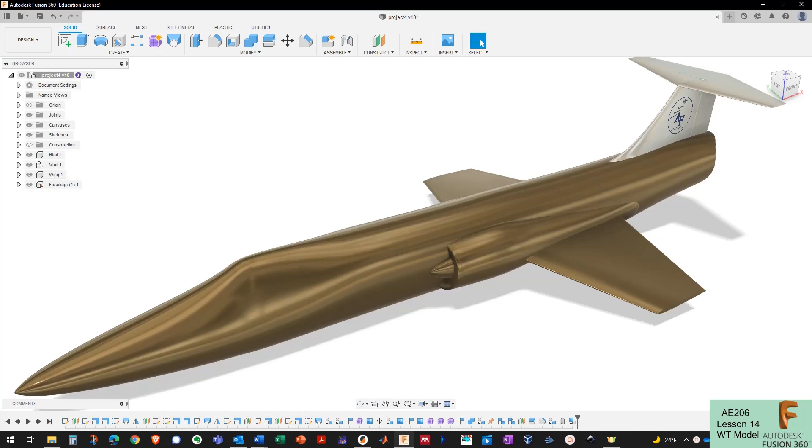Welcome back. This is part 5 of Project 4, where we are going to take your airplane CAD model and get it ready for testing in the wind tunnel by scaling it down and doing what we need to do to be able to print it and mount it on the sting balance in the subsonic wind tunnel. And then I'll also show you how to just print out a display model of your airplane.

Okay, so this is part 5 here. We're going to walk through all of this stuff here. You have two options in this project for what you can print. You can print the full wind tunnel model and join it together so we can actually put it in the wind tunnel, or you have the option of printing a display model.

Either way, you still have to turn in your final wind tunnel model CAD to me. You also have to turn in the CAD of your final airplane model with the assembled joints from part 4. You have to turn in a 3MF file ready to slice of whatever printing option you choose, and then most importantly a selfie of your completed print with your aircraft, whichever option you chose to print.

Okay, so let's walk through this together with my F104 that I've made throughout this project. And this is the version here that I did last time. It's got my joint in here, and I can see my joint right there. And I want to get this ready for testing in the wind tunnel, and I need to make a lot of changes to this model to do that.

So I'm just going to go ahead and save this as a different file name just to make it easier on myself. It is possible to make all the changes in this model and then roll back those changes if you wanted to get to your full scale assembly again. But I'm just going to save another version called wind tunnel model so that I can make all these changes and have both versions easily accessible.

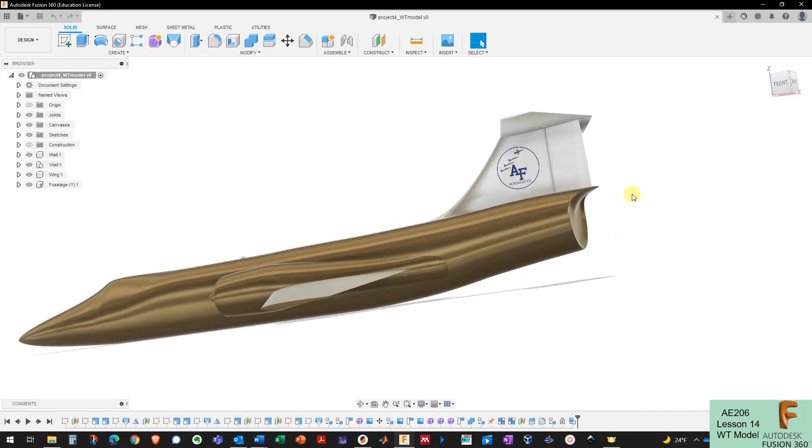So I save this as wind tunnel model, and now that I'm going to print this, I want to get rid of this joint back here that I made for the rudder. It's got this fillet on it, and that fillet results in a very small contact area between the rudder and the vertical tail, and that could be an issue in printing. So I'm just going to get rid of that.

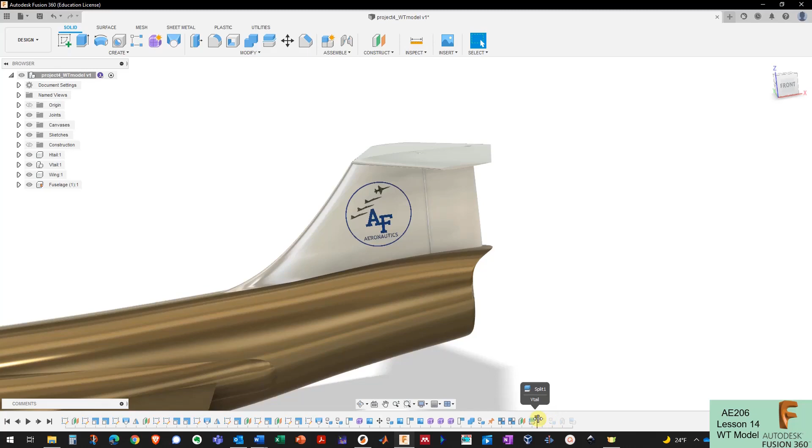And the way I'm going to do that is coming down here to my history and rolling back this timeline marker to before where I made those fillets. You can see the fillet's gone here, and I still have two bodies here, so I want to roll it back before that as well. So I'll roll it back one more. Now I've just got one body for the vertical tail. And in fact, I probably don't even need this construction plane anymore that I put back here to split that, so I can roll it back one more.

And then I can right click and say delete all features after the history marker, because I don't need any of those anymore. Okay. So I got rid of the rudder, I got rid of the joint because none of that matters for printing the wind tunnel model. I'm going to save it again real quick.

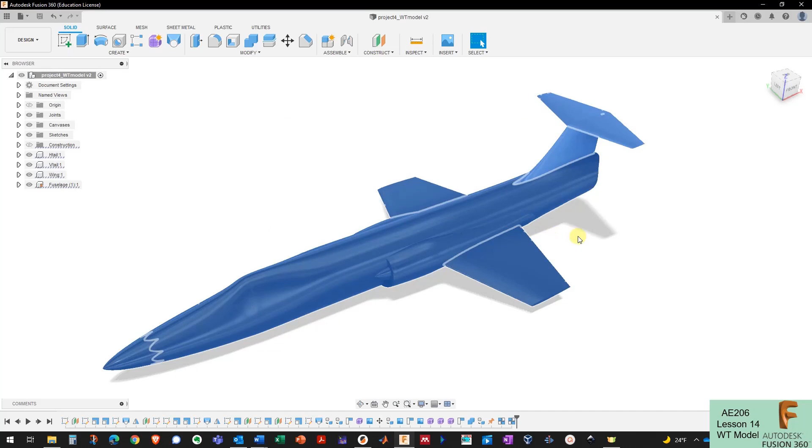And now to get ready for printing the wind tunnel model, the first thing I need to do is combine all these bodies into one body. And so I'm going to select all the bodies. If I select to the right here, I'll only get the ones inside of the selection box, but if I select to the left, I'll get everything that touches the box, and that's what I want.

And then I'm going to combine all of these things. One of them is going to be treated as the target body. The other three are going to be treated as the tool bodies. That's fine. And I'm going to join all these. I'll press OK. And now I've just got one body here, and I think it ended up under the fuselage. So this one body is my entire model right now.

All right, so the next thing I need to do is scale this down to be the right scale to fit inside the wind tunnel. The subsonic wind tunnel has a 3-foot by 3-foot test section, but we wouldn't ever want to even come close to filling that up because of blockage effects.

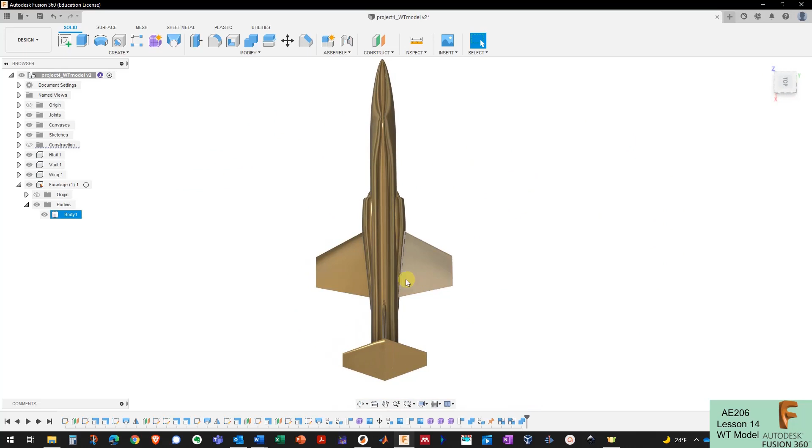So we want to keep the blockage effects in the wind tunnel down to a minimum, and we've usually found that an aircraft with about a 12-inch wingspan does pretty well and has pretty minimal blockage effects in the wind tunnel. My F104 here is a really low aspect ratio aircraft, so if I made the wingspan 12 inches in the wind tunnel, the fuselage would be enormous. And that may produce some moments on the balance that are undesirable. So I'm going to go shorter than 12 inches.

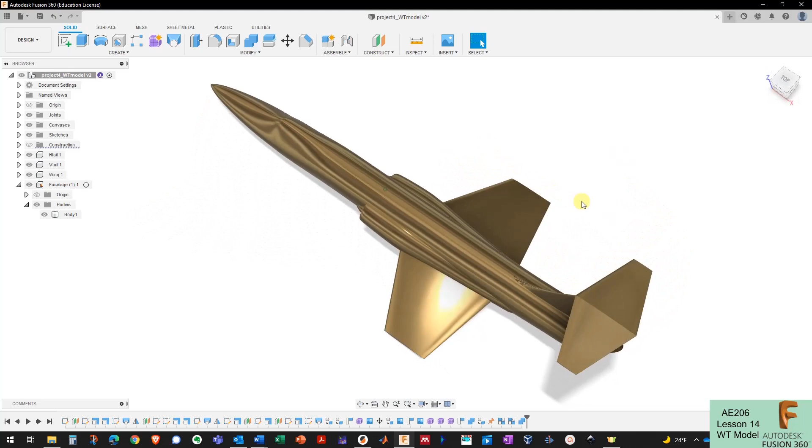And you need to use your discretion in your wind tunnel model. If you have a typical medium to high aspect ratio wing, 12 inches is probably a good number to stick with. But if you have a low aspect ratio aircraft like I do, you might want to go lower as well. So my wingspan right now is still 22 feet, I believe. It's coming up in millimeters right now. I'm going to select secondary units of feet, and yep, it's coming up as 22 feet. It says right there. So I need to scale that down to 8 inches.

So I'm going to select the body here, and I'm going to go modify, scale, and the point I want to scale about is the nose point, so I can find this thing after I scale it. So I'm going to select the nose there. And my scale factor is going to be 8 inches divided by 22 feet. If I press OK, here's my resulting wind tunnel model.

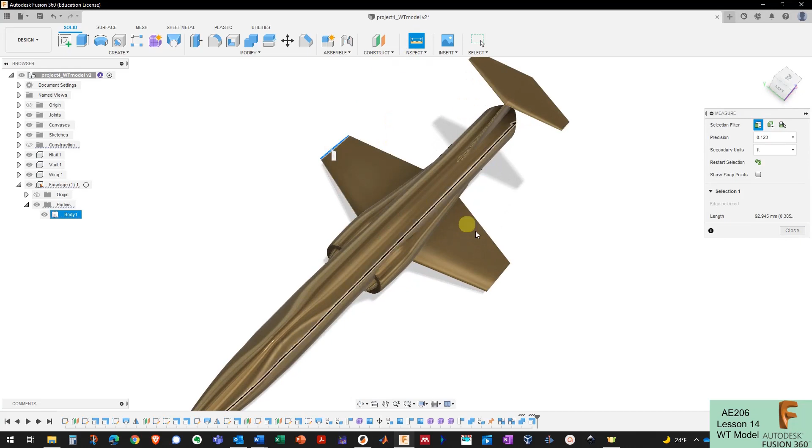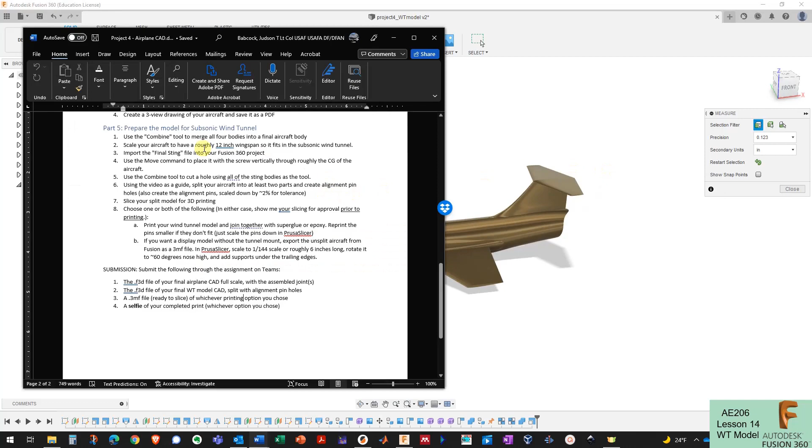And now if I measure the wingspan here, I'll change my secondary units to inches. I've got an 8-inch wingspan. Okay. So now this model is the correct scale for putting in the wind tunnel. And the next step here on the sheet is to import the sting cutout into the project. And I've already got it here. If I open up my data panel here, I've already got the subsonic wind tunnel sting cutout in here.

This isn't the exact size of the sting balance in the wind tunnel. It's a little bit bigger so that it can cut the hole size needed to fit the sting balance inside of with the necessary tolerances and clearances. Okay. So I need to insert this into my design. I'm going to right click on it and say insert into current design. And I'll get rid of the data panel.

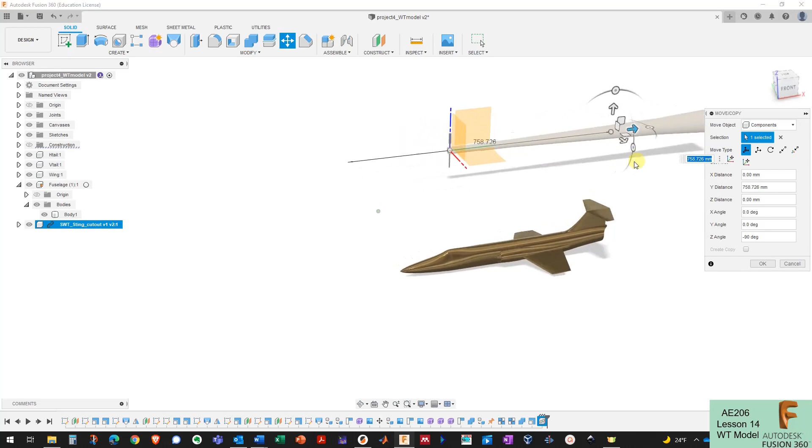And it comes in the wrong orientation, but it's pretty easy to flip around. We're going to turn it around so it can be positioned behind the aircraft. And I can just roughly position it right now. Okay. Okay, so now we need to position this correctly to be able to mount the aircraft onto this sting balance. And the first thing I want to do is make sure that it's lined up centered on the aircraft. We wouldn't want it to be off to one side or the other on the aircraft.

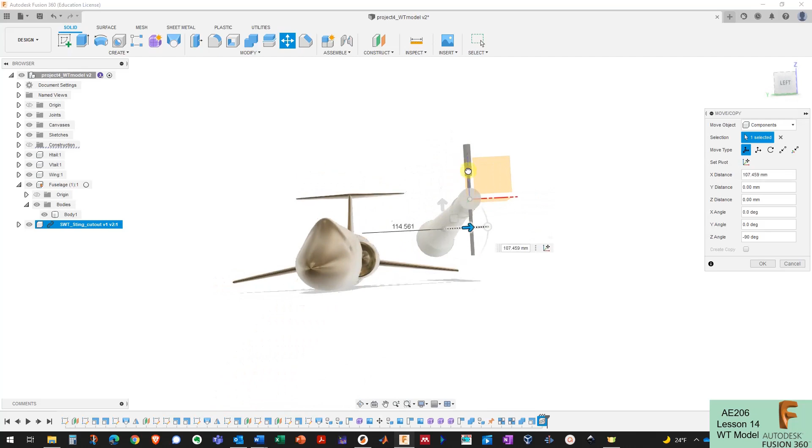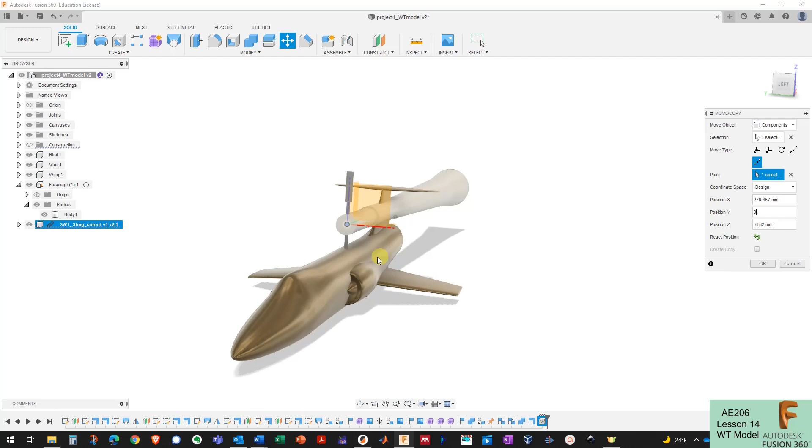So I'm going to choose point to position here. And I need to select a point. I'm going to select the origin point, and this is the Y direction. I'm going to move it to 0 in the Y direction. So now I know that it's centered with the center of the aircraft because my aircraft is centered on Y equals 0 and the sting balance is now as well. Okay. So I can press OK on that, and now we need to decide where to put it up and down and where to put it along the X direction of the aircraft as well.

Okay, so the rule of thumb of where to put this along the X direction of the aircraft is we want the aircraft neutral point to be on the center of the balance. The balance is this front portion of the sting balance assembly here. We want the aircraft neutral point to be centered on the center of the balance so that the moments are distributing roughly an even amount of force between the front and the rear of the balance. Okay, so we moved the sting balance so it was centered in the Y direction, and now the trick to get it centered on the neutral point is to put the set screw 1.9 inches ahead of the aircraft neutral point.

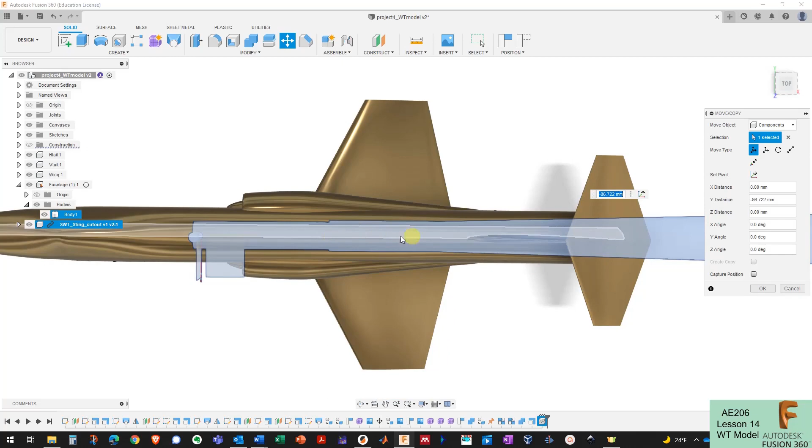Okay, and now we need to know where is the aircraft neutral point, and of course the aircraft neutral point is going to be dominated by the aerodynamic center of the wing, and it's probably going to be a little bit aft of that on an aircraft like this because there is an aerodynamic effect of the tail as well on the overall aerodynamic center of the aircraft.

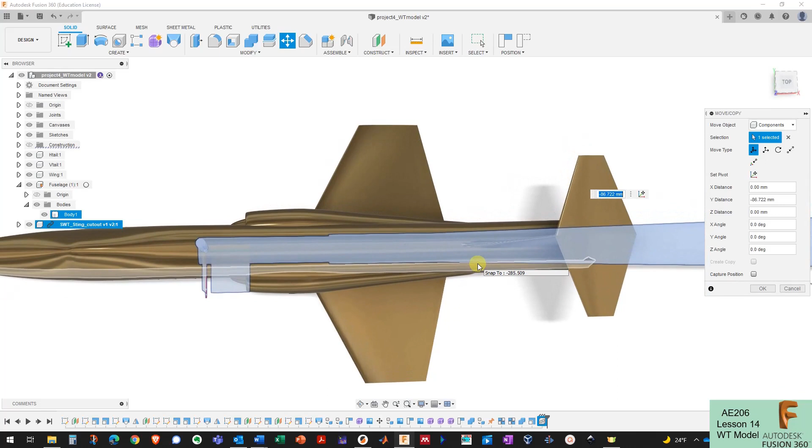But we're going to use the quarter chord of the wing as the aerodynamic center of the wing and the neutral point of the aircraft to get us close in the vicinity of putting the center of the balance at that point to balance out the moments on the balance. And to retrieve that number, all I have to do is go up here to modify, change parameters, and the root chord of the wing was 13 feet. But then I applied a scale factor that was 8 inches divided by 22 feet.

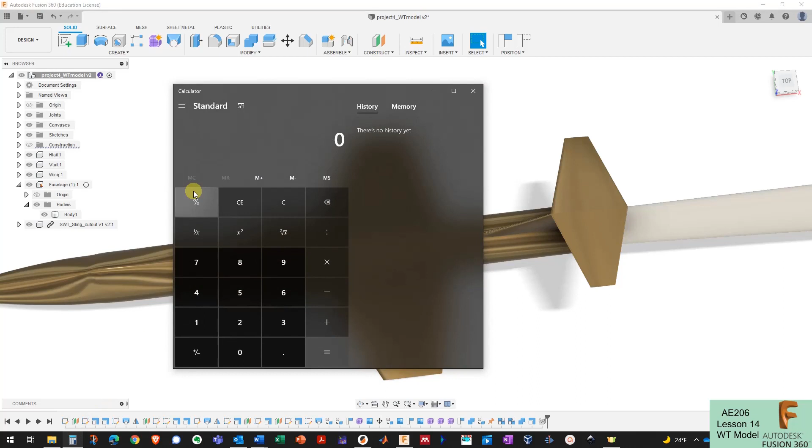Okay, so if I just break open a calculator here, 8 inches is 2/3 of a foot. So if I do 2/3 divided by 22 feet, that's the scale factor that I applied to the original root chord length, which was 13 feet. My new chord length is 0.4 of a foot. In other words, 4.72 inches, but if I divide that by 4, then my quarter chord is about 1.2 inches.

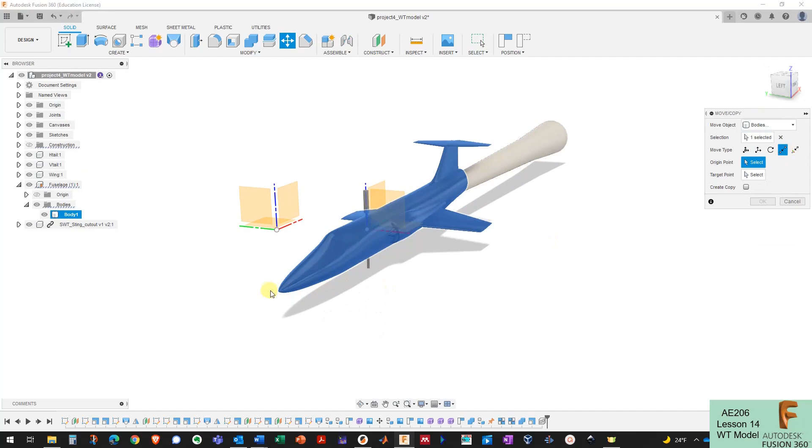Okay, so I'm going to add a sketch plane to make this easy on myself. I'm going to turn on the origin of my model here. Okay, my aircraft's nose is no longer on the origin, so I'm going to fix that really quick by selecting the body, moving it, and I'm going to say point to point. I'm going to move the nose of the aircraft onto the origin like that. So now I've got my aircraft nose back on the origin.

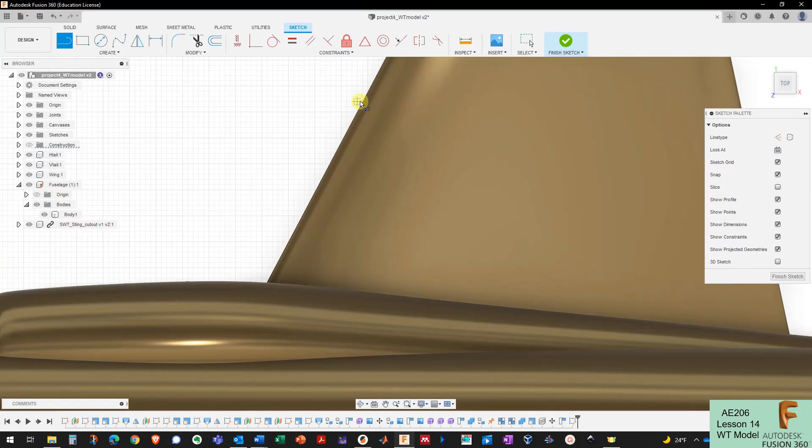I'm going to add a sketch to help myself with this. I'll capture position there. Okay, and now again, I need to locate the point that's 1.9 inches ahead of the quarter chord point. I'm going to add a line here to help myself out locating the leading edge of the wing, which is now buried inside the fuselage. So right now I want to draw a line parallel to the wing, but it's a little hard because of the snap to grid feature that's turned on.

So I'm just going to turn off snap to grid really quick, and now I can draw a line here that's parallel to the leading edge of that wing, right along the leading edge. Now I can do the same thing here. And where these two lines cross, I know that's my leading edge of my wing. Okay, so now I'm going to turn snap to grid back on. Okay, and I'll turn this off just to make it a little bit easier on myself.

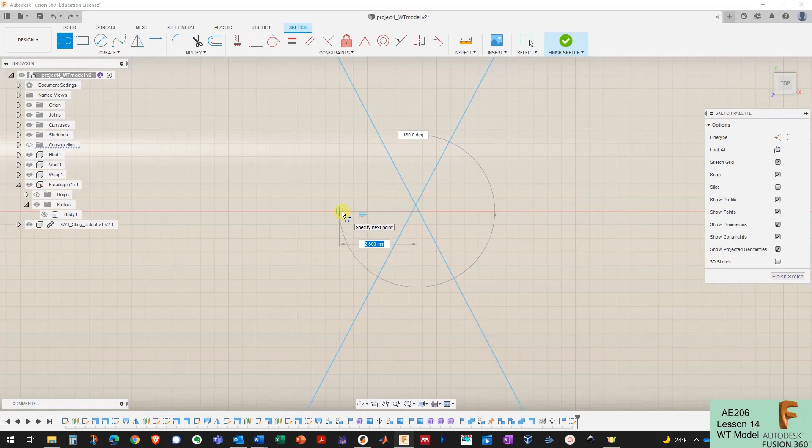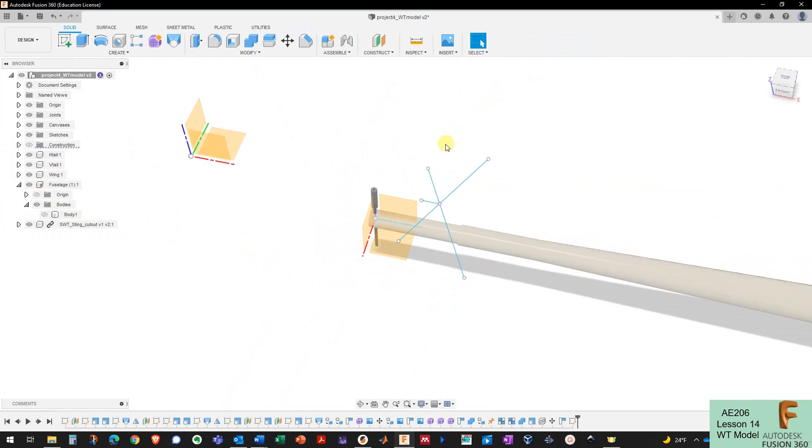Okay, so now I want to dimension this line with the distance ahead of the leading edge of the wing, which is different than the quarter chord of the wing. So this is 1.9 inches minus 1.18 inches. Okay, so that point right here now is the point where I want the set screw of the balance to be. So I'll press finish sketch with that, and I've still got my aircraft turned off, but that's fine.

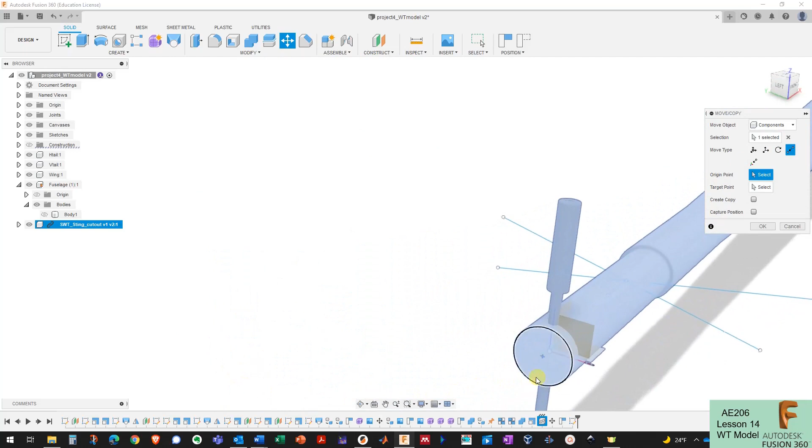I'm going to put the origin of the sting balance, which is lined up with the center of that set screw, at the point that I just made by saying point to point. I'll select the origin point, and I'm having trouble selecting the origin point because it wants to select the face instead, and it's kind of jumping around on me here. So what I can do is hover over the thing I want to select, and I can hold down the mouse button, and it gives me a bunch of options of things there that I can select. So then I can see the origin.

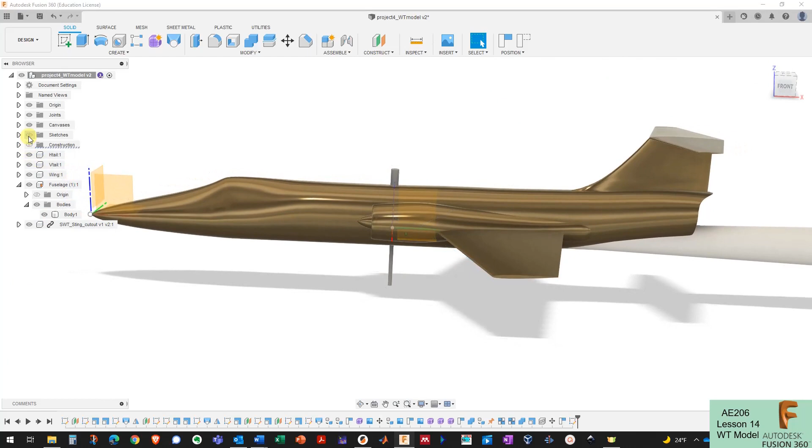Select the origin as the first point, and now select that as the second point. And now I know that the center of that set screw is at that point, which is 1.9 inches ahead of the aerodynamic center of the wing, which is close enough to the aerodynamic center of the whole aircraft in this case. So now I'll turn on the body of the aircraft again. I'll turn off that sketch that I don't need anymore. And now the last thing I need to do is position this sting balance vertically on the aircraft so it's somewhat centered on the fuselage.

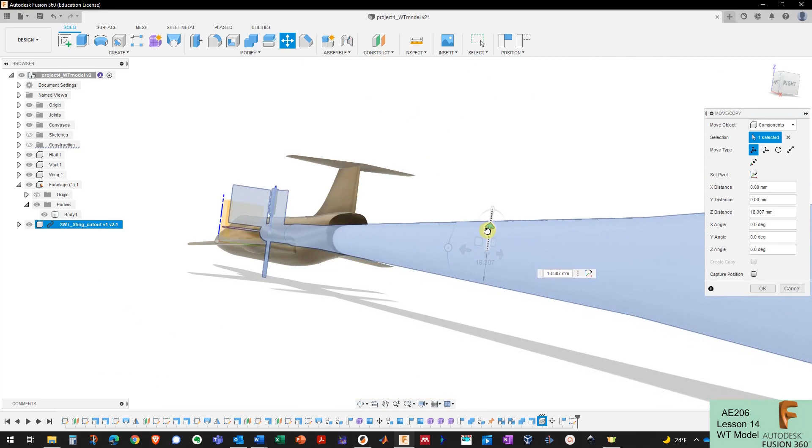And I'll select the free move tool, and this is going to cause a cutout in the bottom of the fuselage of the aircraft here. It's nice if you can keep that cutout contained inside the aft face of the fuselage so that the only thing that the sting balance is affecting is basically the base pressure on the back of the aircraft, which in real life there would be an engine there anyway. So I'm going to move mine up a little bit so it's not cutting out too much of the bottom of the aircraft as well.

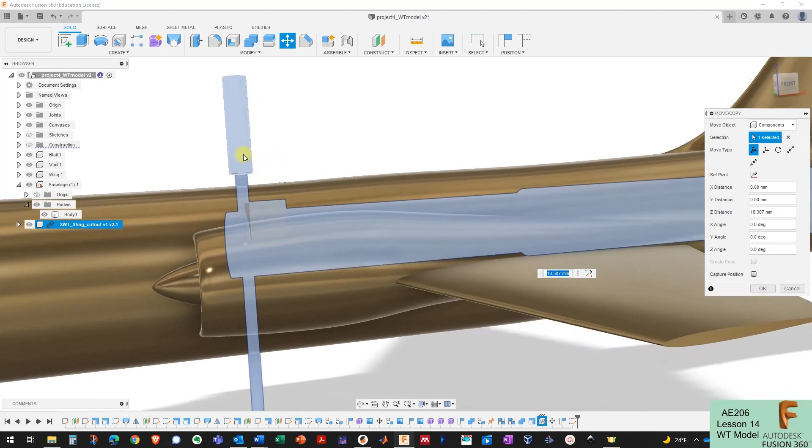Okay, and now we want to check the set screw cutout. This cylinder coming down here is just going to cut a hole for us to be able to get in and set the set screw to be able to attach the aircraft to the front of the balance, and it looks fine. This is just an expansion on the set screw hole to make it easier to get in there when it's a really deep hole, and we don't need that right now anyway. Sometimes we could even attach the aircraft to the balance from the bottom, so we can put the primary set screw on the bottom, but it doesn't matter in this case because the aircraft's not big enough to need this expansion part up here anyway. So I'm just going to press OK on that.

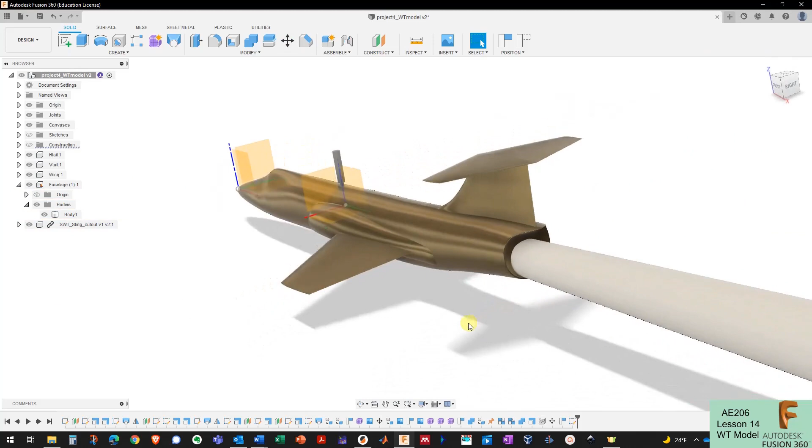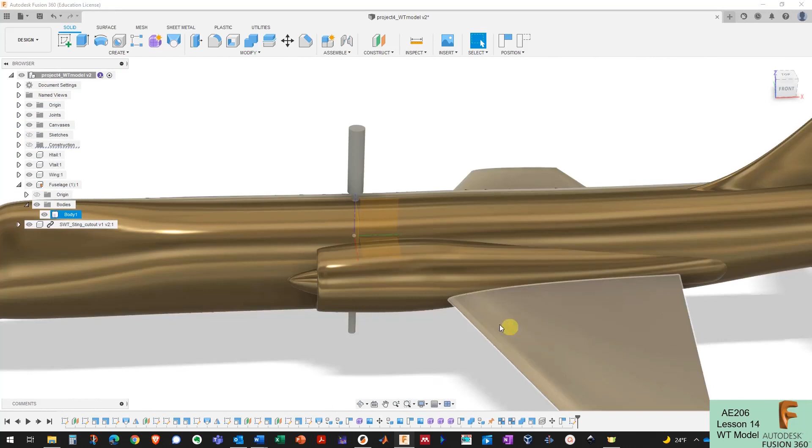All right, and that is the position of my sting balance component that will allow me to mount this aircraft in the wind tunnel in the best way possible. And now I can select wireframe with hidden edges, and we can kind of see the sting balance inside of the model there as well. And we're ready to cut it out. So I can click the combine button. I'm going to capture position so we keep everything in the right place.

Click on the aircraft. The tool body is going to be the entire sting balance component. So I'm going to select this part of it, and then I'm going to control select that part as well. That should be everything I need. Now the operation here I want to do is a cut operation, and that's the hole that it's going to cut out in the back and through the top and the bottom. So I press OK. Now I can turn off the visibility of the sting balance assembly.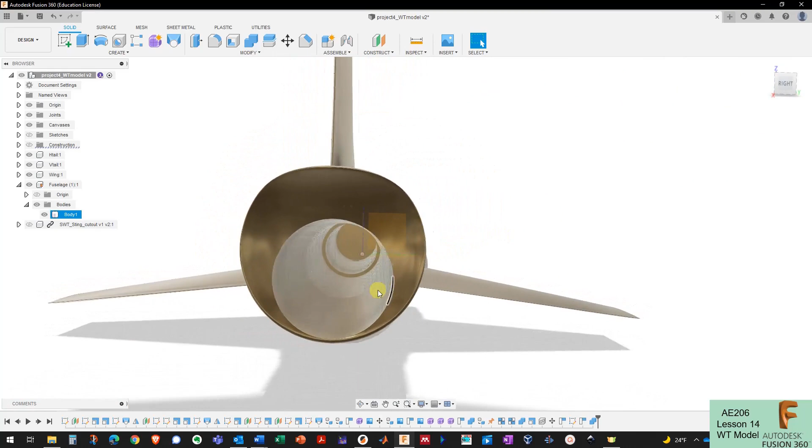There's my set screw hole at the top going all the way through. There's my hole through the back of the fuselage. Everything looks clean in there. And I think we're ready to print this model out and be able to mount it into the wind tunnel.

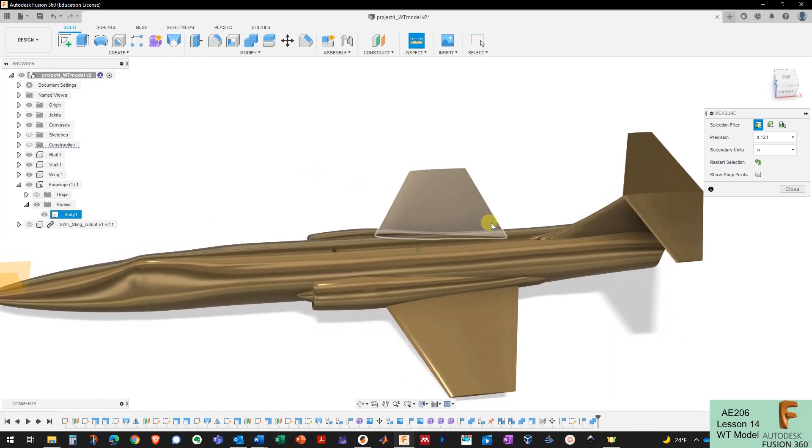Right now, I'm just going to select this here. And so right now our aircraft is 19 inches long. We couldn't print that out on a Prusa printer. The maximum height of the Prusa printer is advertised as 210 millimeters. It's a little bit lower than that in reality. So we need to split this up and glue it back together after we print it out. So we need to come up with a strategy on how we want to print this to minimize supports, to make it easy to glue back together, and to make sure that we are able to test it easily.

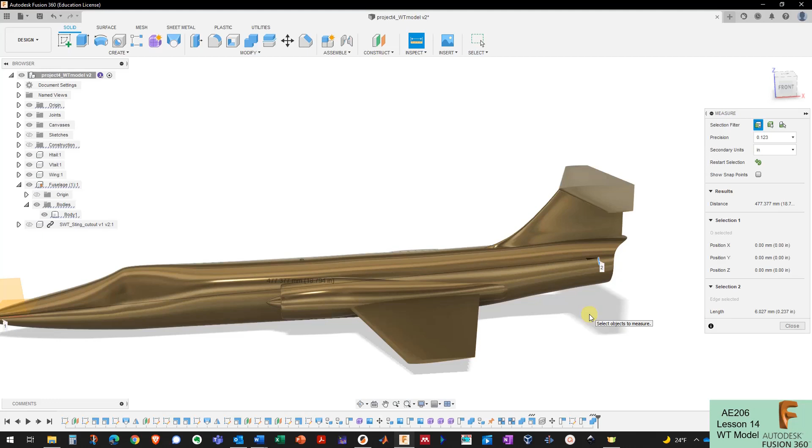Okay, so I'm going to use construction planes as a splitting tool, so we can move this construction plane back and forth here to figure out where we want to split it. And right now my total aircraft is almost 480 millimeters, so if I split this in half, that'd be 240 millimeters, and if I printed that standing up on the Prusa printer, it would be too high. So I'm going to need to print this in 3 pieces. That's the first thing I need to figure out. Now I need to figure out what those 3 pieces are going to be.

And I think this tail would print off pretty nicely by itself. I wouldn't need to have supports underneath this curve, just underneath the horizontal part of the T-tail. So I'm going to move a construction plane back here to right in front of the tail, right there. And if I split it there, I could print the tail by itself, so that would be good. It's giving me a warning here that my construction plane is not visible, so I'm going to turn on the visibility of that. Okay. Right, so there's my first cut plane.

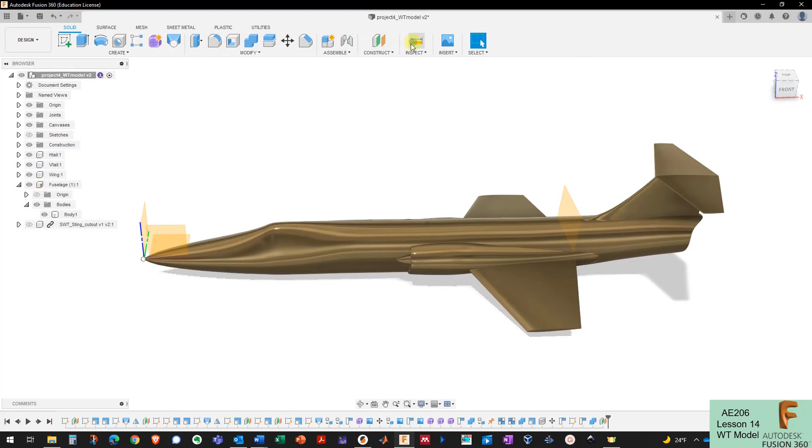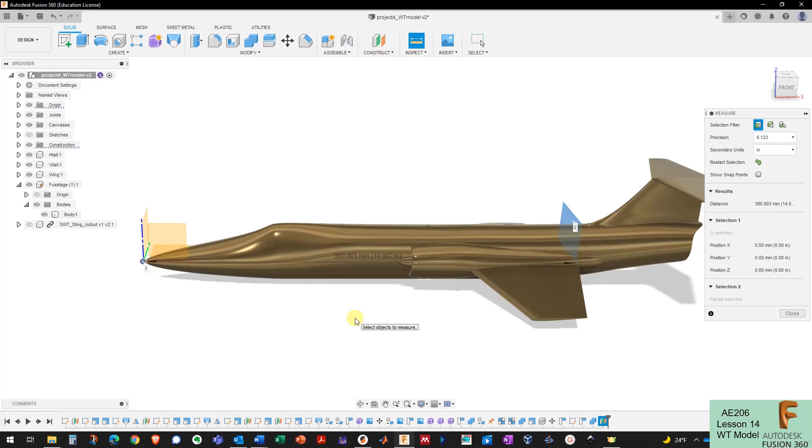And now I need to see how much aircraft I have left to print, so I can measure that again. That's 380 millimeters. If I cut that in half and print it, it'll be 190 millimeters each, which will be underneath the maximum height of the printer of 210 millimeters. In reality, like 208 millimeters is a good maximum to stick with when you're trying to print things out vertically on the Prusa printer. So I've got some latitude here on where I select this next point.

If I go in front of here, when this part of the fuselage is printing out, it's going to have to be supported underneath the inlets. That's not a big deal. You know, I could try to go behind the inlets and then print out the front half, but that's 231 millimeters, and that's not going to fit on the printer. So I am going to have to support the inlets, and I'll cut this in front of the inlets there at 200 millimeters. Yeah, that's fine. Okay. So then I'll press OK, and I've got my 2 cutting planes now.

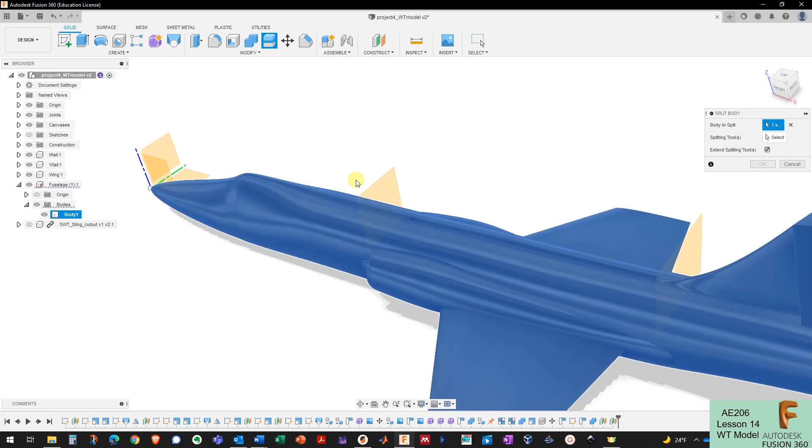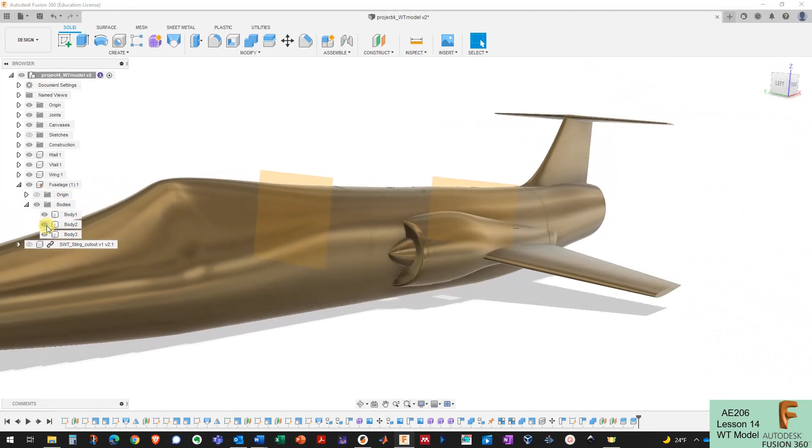So I'll use the split body command. I'll select the body to split. I'll select the splitting tools. There's the first split that's going to take place. And then I'll do it again. I'll select this back body. I'll select the splitting tool. And there's the back cut that will take place. And that all looks fine. Okay, so now I can print out these bodies one at a time. There's the hole coming through the rear body.

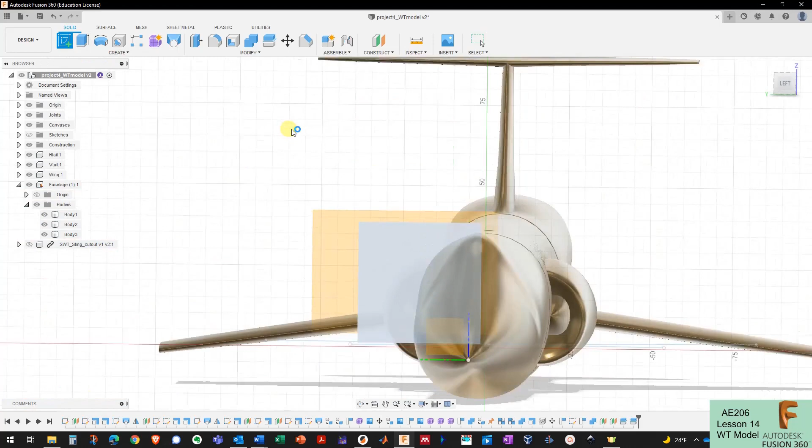Okay, but now the trick is going to be gluing these things back together to make a complete wind tunnel model. And if I just have a smooth, flat surface like that come off the printer and I try to glue the rest of the fuselage to it, it's going to be sliding around. It's going to be really hard to clamp in place. So what I want to do is create some alignment holes that make it easy for this thing to go back together. So I'm going to create a sketch there. I'm going to turn off the body, and I'm just going to create a couple circles on here.

10 millimeters is a good circle to go with, and I'm going to create 2 of them. If I just created one of these, I could line it up on one, but then the 2 bodies would still be rotating relative to each other, so 2 of these will fix them in place. I can't see that sketch, so I'm going to turn that on. So there's my 2 alignment holes on the front half. Now I'm going to create a sketch on this back half here. I'm going to turn off the second body and turn off that first sketch.

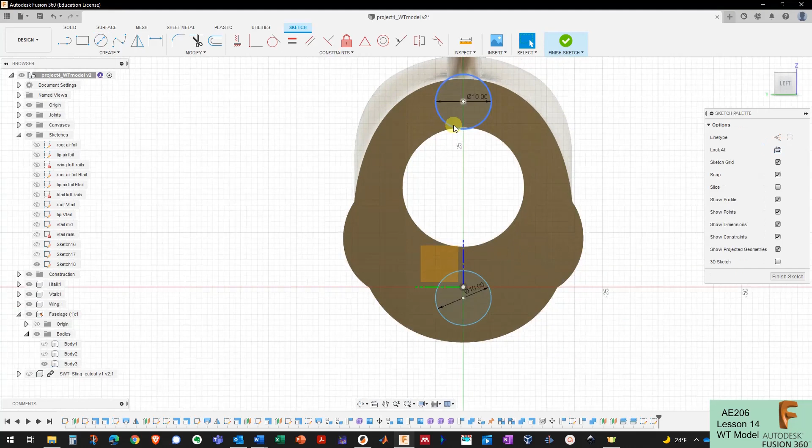Okay, so I need to create a 10 millimeter hole here, and I need to see if I have space for a 10 millimeter hole up here. Not really. It's going to be going past the inner and the outer surfaces, so I'm going to put one of these holes here and one of them here in this case. And I've still got my 2 alignment holes then, and they're not sticking outside the aircraft. So I'm going to turn on the other sketch. Okay, so now I need to cut the alignment holes using these circles.

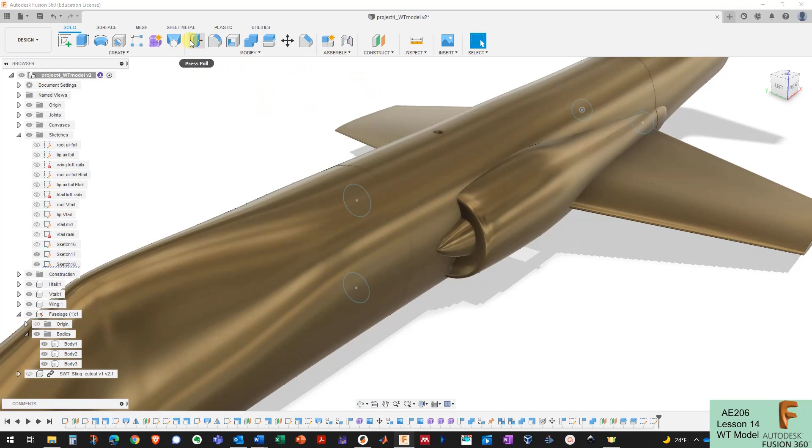So I'm going to use the extrude command. I'm going to select the circles, and this is where a 2-sided extrusion really comes in handy, because I'm going to take it one way 5 millimeters, and I'm going to take it the other way 5 millimeters. I'm going to do a cut, and that'll cut a nice little alignment hole in there. And then the same thing with these alignment holes back here. I'm going to do a two-sided one, 5 millimeters and 5 millimeters.

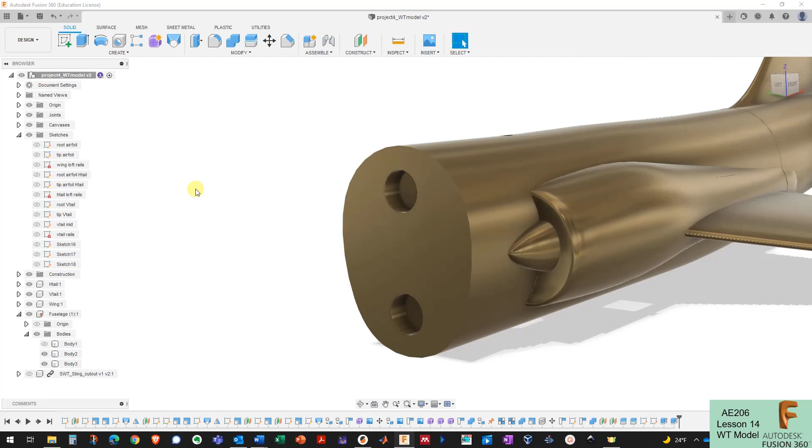Okay, and so now I've got those alignment holes made, and now we'll need some pins to put in there, but those are actually easier to make in PrusaSlicer. We'll just add a cylinder that's a little bit less than 10 millimeters to our print. A 9.8 millimeter cylinder will fit inside of this 10 millimeter alignment hole pretty nicely. Okay, so now I've got these three parts that are ready to print, and I want to export them. And I can actually export them all at once by coming up here to the top of the model tree and selecting Save as Mesh.

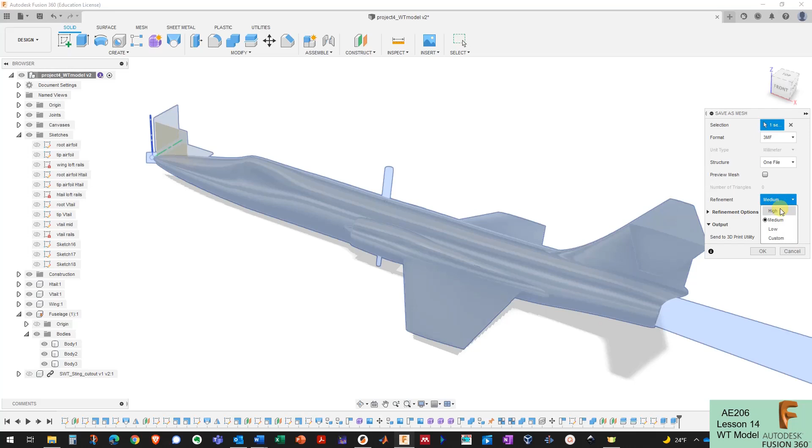Sometimes when you're saving aircraft meshes with medium refinement, you can run into some issues with the mesh and the smoothness of the aircraft and stuff. So I'm going to choose high refinement here, press OK, and I'm going to save this file to my hard drive. Okay, so I've got PrusaSlicer over here, and I'm going to drag and drop.

And it's asking me, should I consider this as a single object having multiple parts? And I'm going to say no, because I want each part to come in separately, because I want to manipulate them separately. Okay, so I've got the whole aircraft here, but I've got the three bodies here, and now I can position these three bodies and get them ready for printing.

So first thing I want to do is to put these flat on the bottom of the platter, so I'm going to say to print on this face right here. And that one looks good. And now for this one, I'll print it on this face and try to put that in position. Now this isn't going to print, you can tell because it's a different color, and this dark blue on the wingtip here is actually sticking outside the print volume.

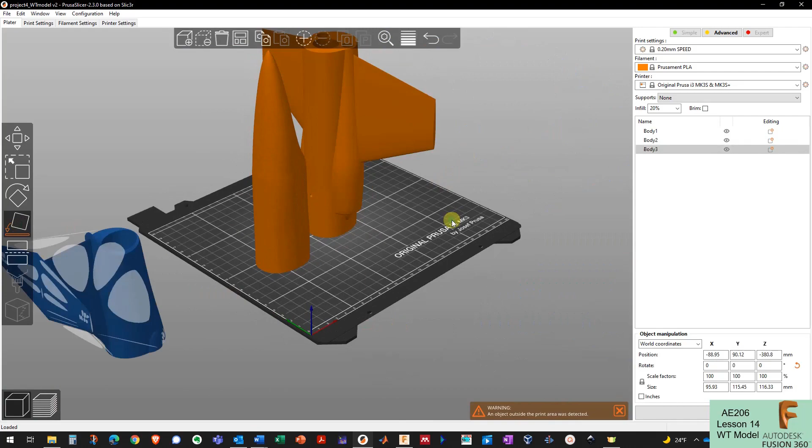So I need to drag it back inside the print volume without going out the other side of the print volume. So I'll just kind of center that up in the print volume. And now for the tail, I'll position that. Okay, so that's a pretty good arrangement here. I can see my alignment holes here, and I don't need any support underneath these holes. The printer can bridge across the top of those holes just fine.

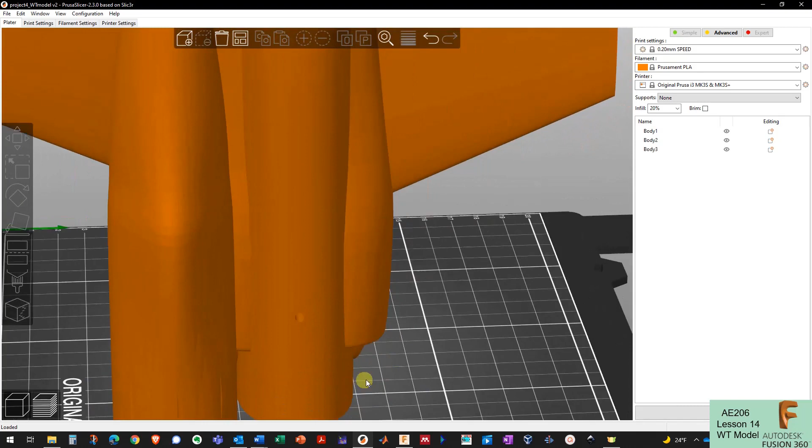I don't need any support underneath the wing. If we look at the wing here, the leading edge sweep of the wing, that should be able to print fine without supports. This curvature of the front of the vertical tail should be able to print absolutely fine without supports. I don't need any supports here. Where I do need supports probably is on the horizontal tail out here. I'll need some supports there, and I'll obviously need some supports on the inlet of the aircraft here.

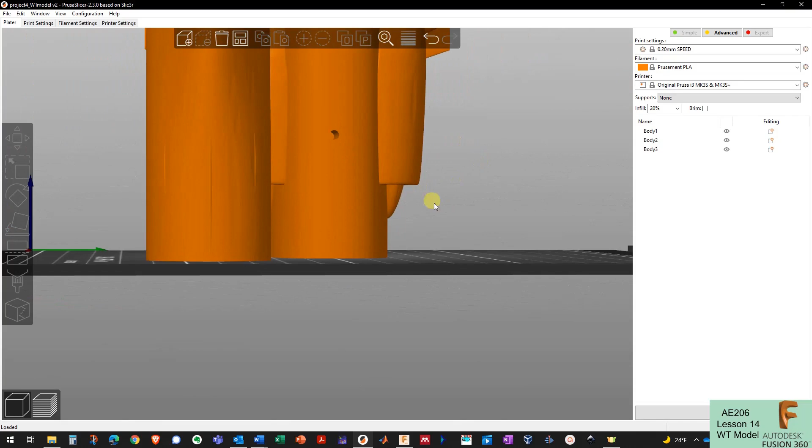So I'm going to say support on build plate only, and I'm going to check my setting here for support material and make sure this overhang threshold is dialed back to like 20 degrees to try to avoid unnecessary supports. And now I want to check the rest of my settings. 0.2 millimeters is perfectly fine for wind tunnel models, especially for trying to reduce the print time. 20% infill is a little much for a wind tunnel model. You could probably get by with 10 or 15% infill just fine. I'm going to do 15%.

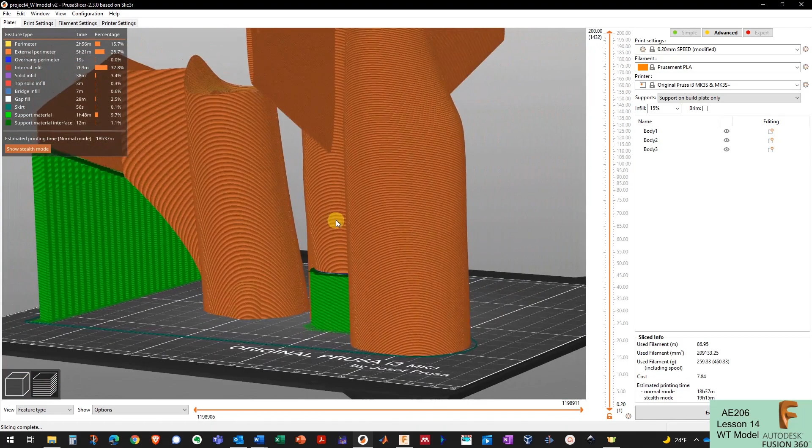So I'm going to slice this and take a look at what we got. Okay, and this is exactly what I had in mind. The only supports are underneath the inlet and the T-tail. That T-tail needs to be supported, and the inlets need to be supported. I don't need supports, for example, inside of that set screw hole. It can bridge across the top of that just fine. I don't need supports anywhere else on this aircraft. Okay, this is looking really good. I think this is going to print successfully.

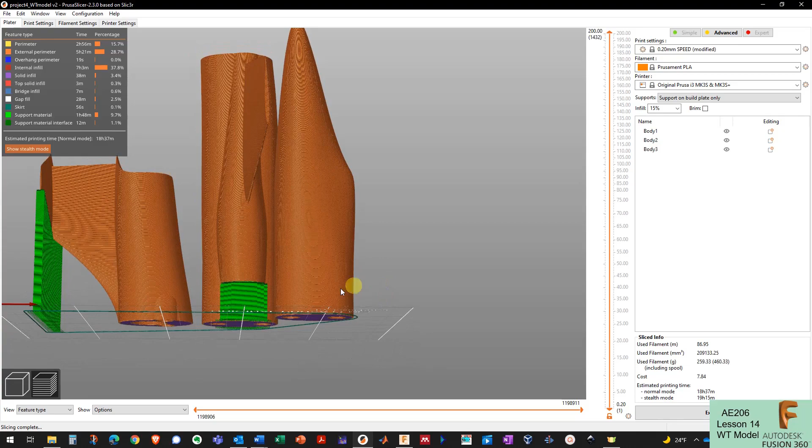I think I have enough contact area here with the bed. Sometimes with these tall prints, if there's not enough contact area with the bed, they can end up falling over. As the higher they get, the printer is imparting some small forces onto the top of it, which is causing a moment, which can cause it to fall over. But I think I've got enough contact area here. I just need to make sure I've got a really good first layer and check on this print throughout the print. And it's going to be almost a 19-hour print job right now, so it's definitely going to be an overnight job. But I'd want to check on it as much as I could anyway.

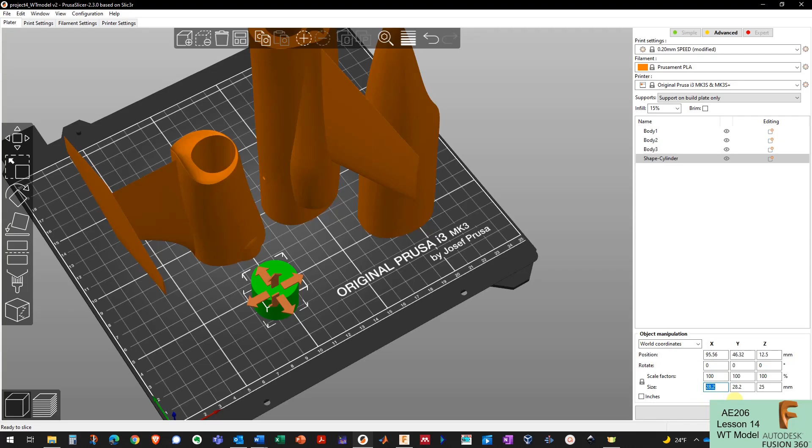The only thing I'm missing are the pins to put in these alignment holes, and those were 10 millimeter alignment holes in CAD, so a 9.8 millimeter pin will work just fine. So I'm going to add a shape, a cylinder, and I'm going to go back out here to the editor view. There's my cylinder right here, and I'm going to change the size in one of the directions here to 9.8 millimeters. So there's a 9.8 millimeter cylinder that can act as a pin. And what's important here is that it's only a little bit under 9 millimeters high. So if you remember, I cut that alignment hole out 5 millimeters on each side.

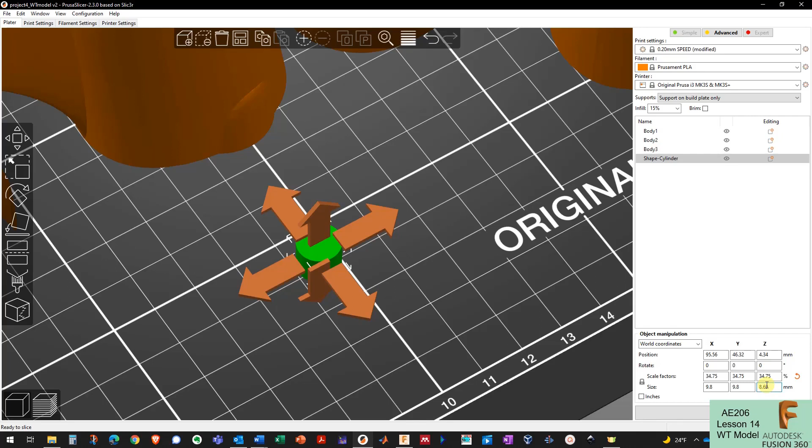So we'd want to stay under 9 millimeters for the total length of the pin. As long as the total length of the pin is more than 6 or 7 millimeters, but less than 9 or 10, then we're in good shape.

Okay, so I've got one of these, but I need 4 of them, so I'm going to press Shift plus to make 4 of these things. And there's my 4 alignment pins that I need to put the aircraft back together. So now I'll hit slice again, and this thing is ready to be exported for 3D printing.

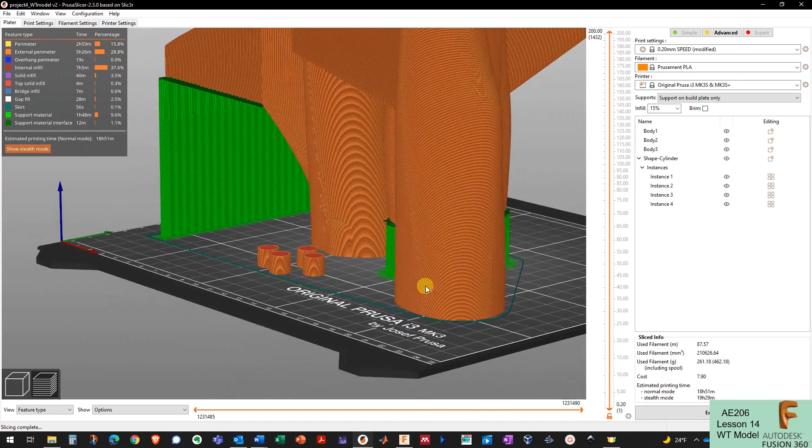Okay, and after it's printed, I'm going to have to get some epoxy, use the alignment pins to line up the different parts of the fuselage and epoxy them together. And then once I do that, I can do a fit check with the sting balance and make sure that everything looks good for testing.

Okay, so I need to save this as a ready to slice file because that's part of the turn-in. So be sure to go to File, Save Project As, and save it as a ready to slice 3MF file so that I can check your slice when you turn this in.

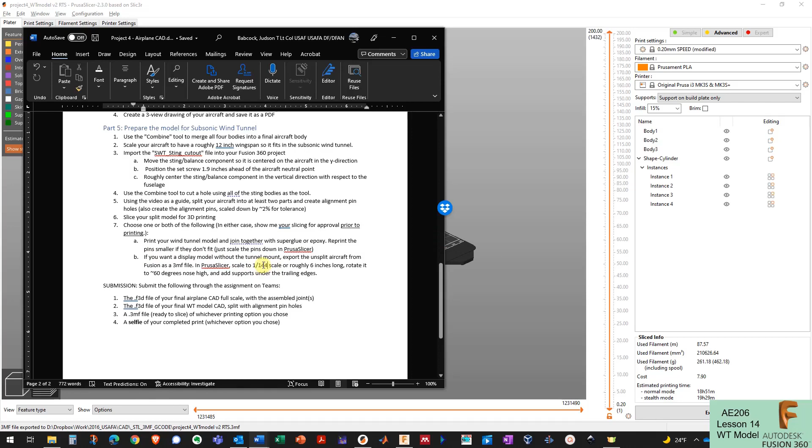Okay, so back to the handout here. The last thing I'm going to show you is how to print a display model without the wind tunnel mount cut out and stuff, something that you could have on your desk. So I'm back in Fusion 360 here, and I'm back with my wind tunnel model where I've got this cut out, but I'm going to roll back the timeline marker to the version before I cut that out. Okay, so now that cutout disappeared.

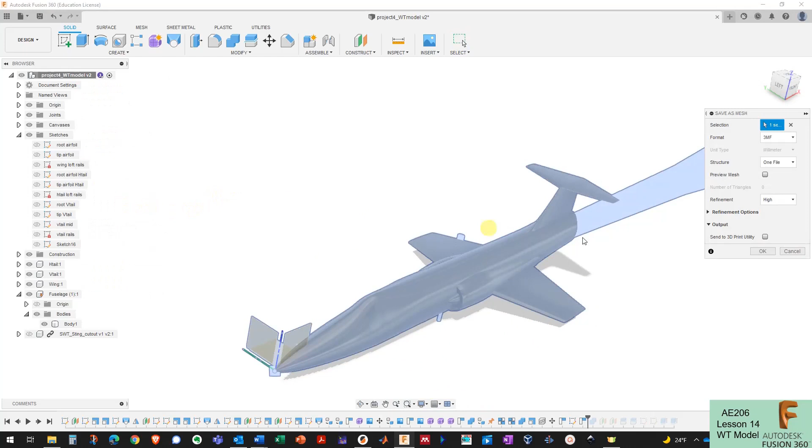So now I've just got my aircraft here without the cutout, and now I can right click on the top and go Save as Mesh, and I'll do high refinement again because it's an aircraft. And instead of saying wind tunnel model here, I'm going to say display model. And now we'll bring this in and talk about how to slice this.

Okay, so I'm back in PrusaSlicer and I want to slice my display model, so I'm going to hit New Project. I'll remove everything. I'm going to drag and drop my display model 3MF that I just saved out of Fusion onto the plater here. Okay, so there's my display model as it came in, and obviously it's way too big right now, so I want to scale it down to something reasonable.

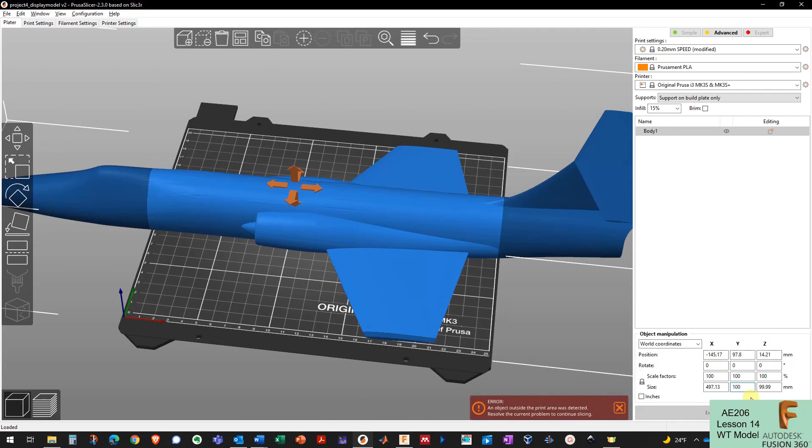1 to 144th scale is pretty good, so I could divide the 22-foot wingspan by 144 and make that my new width, but I'm just going to wing it here. So I'm going to look at my wingspan here. My wingspan is in the Y direction, so in the Y direction right now my model is 200 millimeters wide, so I'm going to do it 100 millimeters wide in the Y direction. So it shrunk it down.

That's still looking pretty big for a 3D print, so I'll do 80 millimeters in the Y direction, and yeah, that's going to be pretty big still as well. So 70. Okay, this is something that's more manageable in size and suitable for a display model.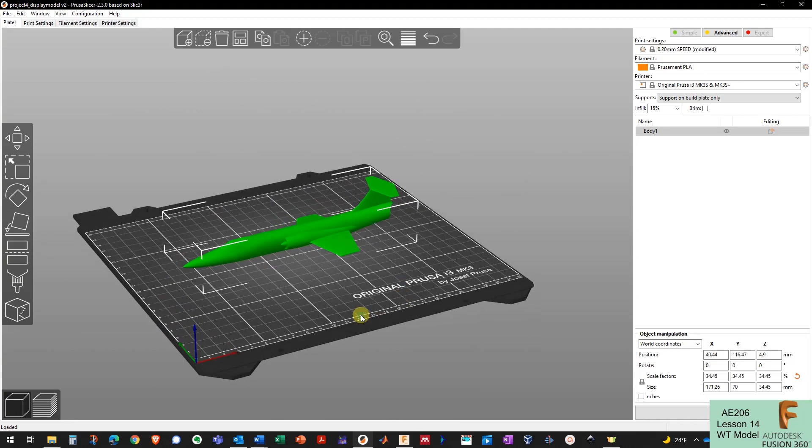All right, if I hit slice right now, this is going to be a horrible way to print my aircraft because it's going to need a massive amount of support underneath of the wing and the tail, and when I take those supports off, I'm going to have a really rough surface underneath my aircraft. So I want to find a better way to print these aircraft, and what we've found works well is to angle them up so they can print as much as possible unsupported.

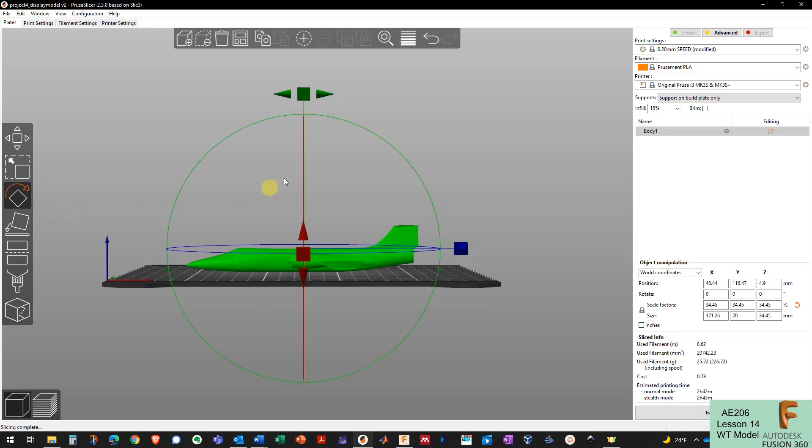So I'm going to rotate it up right about there, and I'll rotate it a little bit more. Okay, so most of the fuselage now can print unsupported, and most of the wing can print unsupported. Most importantly, the leading edge of the wing will be unsupported, so I'll have a nice clean leading edge, including the leading edges of the tail.

So the only thing I need to support in this arrangement is basically the trailing edge of the wing and underneath the fuselage, the back of the fuselage, and underneath the horizontal tail. So I'm going to make sure that my support material overhang threshold is set to 20 degrees. I might even bump it down to 15 degrees because I know these ones can work out pretty well.

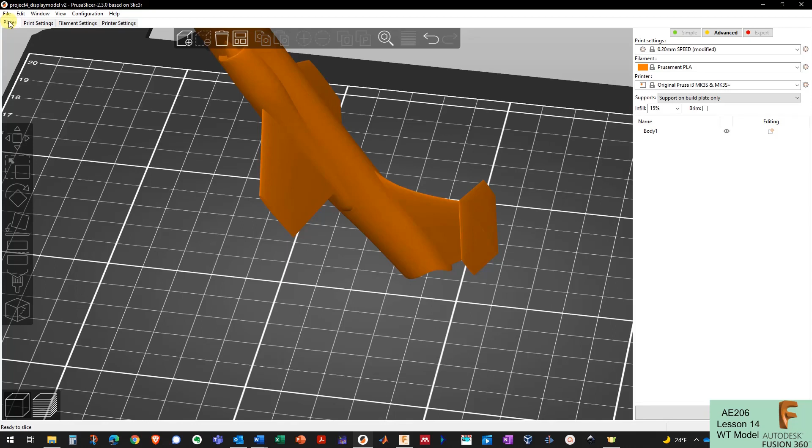So I've got that set, so now I'm going to hit slice now. Okay, and there is the sliced view of my aircraft, and I only needed a little bit of support underneath the back of the fuselage and the tail and the trailing edge of the wing.

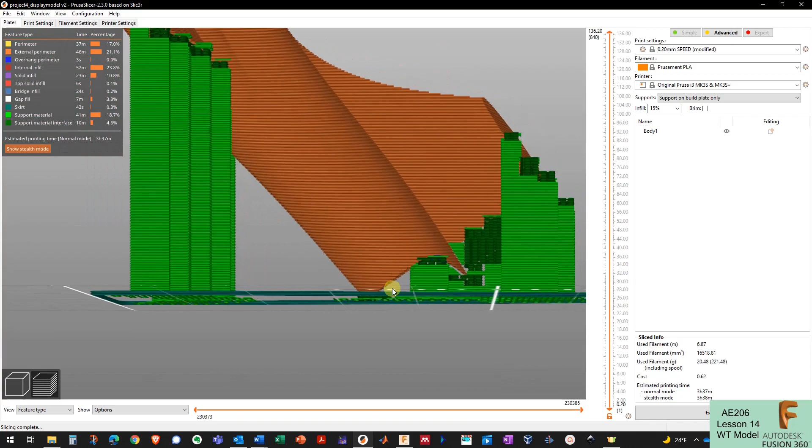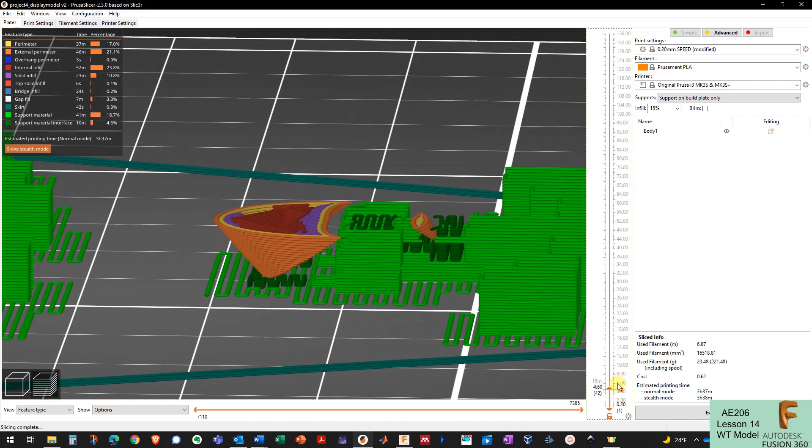But I really want to take a close look at this and figure out what's going to happen before it actually happens. Okay, and I'm looking at where the fuselage is going to start. So if I drag my layers down here, my fuselage is building up as this kind of upside down triangle. Okay, and it's not really even going to connect to this support, so until that triangle connects to another part of the fuselage, so right here, the back of the fuselage becomes really sturdy because now this big piece is connected to another piece that has its own support, so it's got 2 points of support.

But up until then, this was just resting on this piece, and I can pretty much guarantee you that this little piece here is going to fall over as the printer is trying to print it because it's only resting on this little part right here. So I really want to add some support around this part of the fuselage to make sure it doesn't fall over and make sure it can get to a place where it can connect to another part of the fuselage and get a couple points of support on the bed.

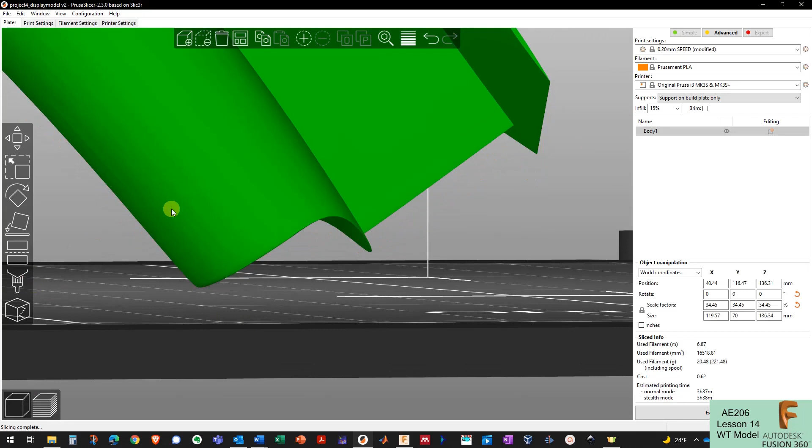So there's a couple of different ways I could do that. One of them is I could come in here, click on the body, click on the Paint On Support tool, and tell it, using the Paint On Support tool, to support a little bit more underneath the fuselage, and hit slice again.

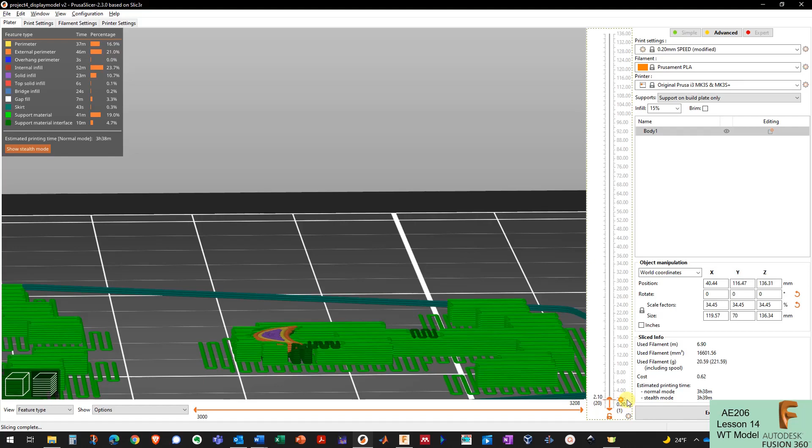Okay, and as a result of that, I've got a lot more support around the bottom of the fuselage. If I go through my layers here, I can see as this thing builds up, it's getting encased in this support material, which will still come off pretty easily, but it's definitely preventing it from tipping over. And then it can connect to the rest of the fuselage and keep on building successfully from then. So that is definitely something that I had to do to make this print successful.

And besides that, I think that this is going to work really well. This is going to be a really nice print. I'm going to try this one. It's going to be about 3.5 hours to print, which is pretty reasonable for an aircraft like this, and it should make a nice smooth display model with nice smooth curves and surfaces on it.

Okay, and once again for the final turn-in, I want the Fusion 360 file of your final airplane CAD with the assembled joint, full scale. I want a Fusion 360 archive file, F3Z file of your wind tunnel model, split with the alignment pinholes, a 3MF file ready to slice of whichever printing option you chose, and then a selfie of your completed print. And just like Project 3, I put the due date of the selfie a week past the due date of the rest of it to give you time to get your print done.

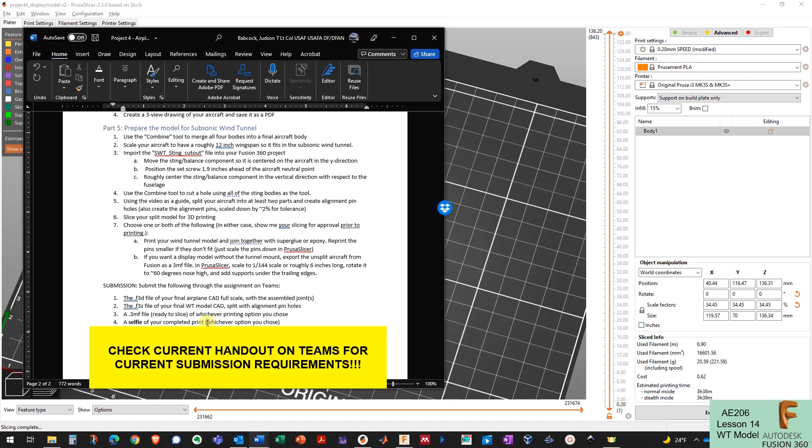All right, and just one more time, all you have to do to get to those F3D files is go File, Export, and the F3D file is the first one that pops up, so you can save that file to your hard drive. For the wind tunnel model, if you go File, Export, it's going to export it as an archive file because it's got the Sting component in there as well, which is fine. Okay.

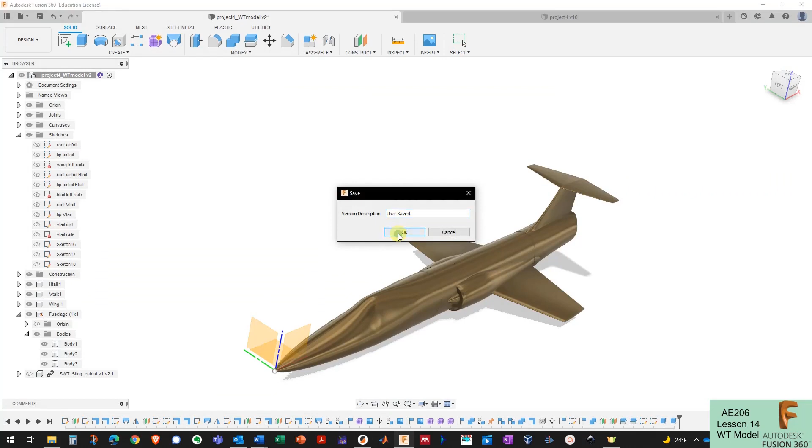All right, so that covers it for Project 4. I hope you have fun with this project, and I'll see you in class.

The other thing that I want to warn you about is trying to print and slice thin parts. Okay, the nozzles that we have on our printers are 0.4 millimeters wide. So it's physically impossible for the printer to print a feature that's smaller than 0.4 millimeters wide, and the printer will just ignore any features that are smaller than that. For example, trailing edges, where the wing comes to a very thin edge at the back. Sometimes, especially when you scale your model down, those trailing edges can be less than 0.4 millimeters wide, and so the printer can't even print them.

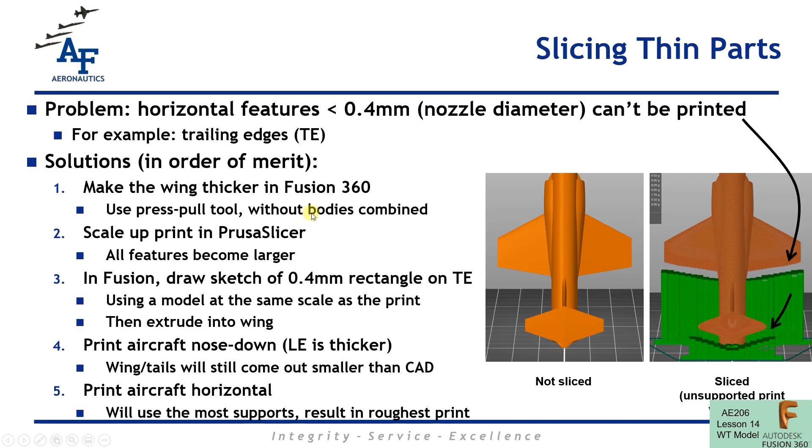Finally, you could try to print your aircraft in more of a horizontal orientation, and this will cause more of that thin trailing edge to be rotated down into the XY plane, where the printer can actually resolve a smaller feature than 0.4 millimeters because we can go down to a 0.2 or 0.1 millimeter layer height in the XY plane. Okay, so I've kind of presented them in order of preference. The first and best option is just to make the wing thicker in Fusion 360. So that's what I'll show you right now.

Okay, so I've got my F104 here in Fusion 360, and the key to this is going to be to make sure that these wings and tail are not combined with any other bodies. If you combine this all in one, this trick will probably fail, and you need to uncombine it. So go back in your timeline and uncombine these things, and then try to make the wing thicker.

And the tool that we're going to use is the press pull tool, and we can just click on a surface or a face of the wing, use the press pull tool, and we can actually just pull it out and make it a little bit thicker. Now this tool is kind of like the fillet tool, where if we just grab that handle and pull it out by a bunch, the operation's probably going to fail. But if we type in small numbers here and only do small changes, we can see the wing get thicker slowly.

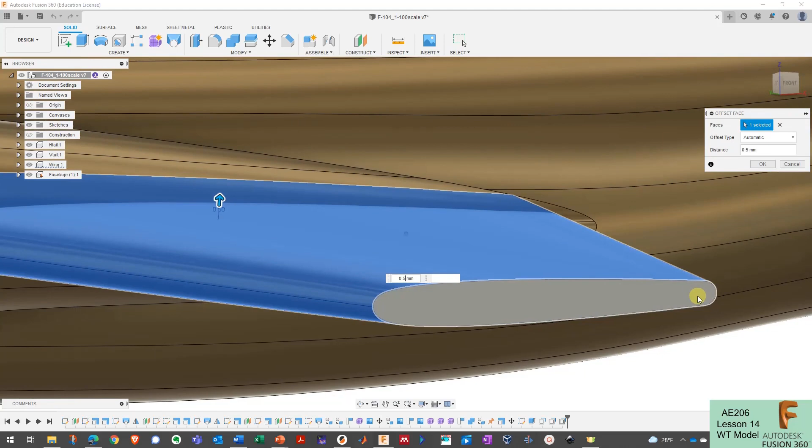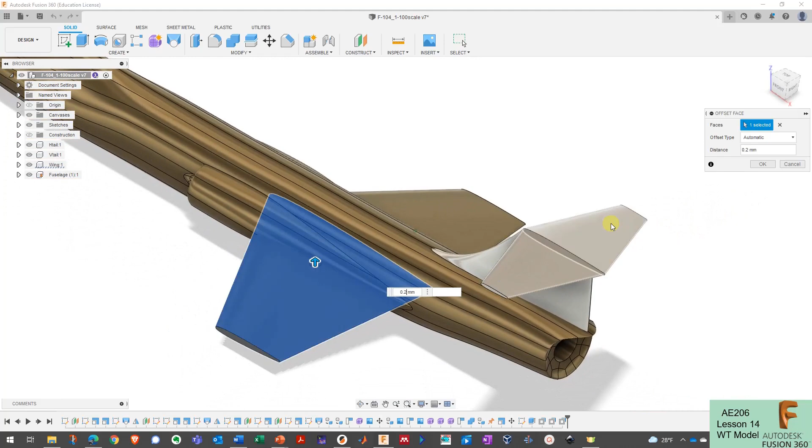Now we're losing part of the wing shape here, that's for sure, but I've kind of exaggerated how much thicker we need to make it in this case. In this case, I only had to make it 0.2 millimeters thicker, which was 0.4 on both sides. And this actually still looks pretty airfoil-ish and results in a successful print. So this press pull tool and making your wing a little bit thicker is the first solution that you should try for that thin part problem.